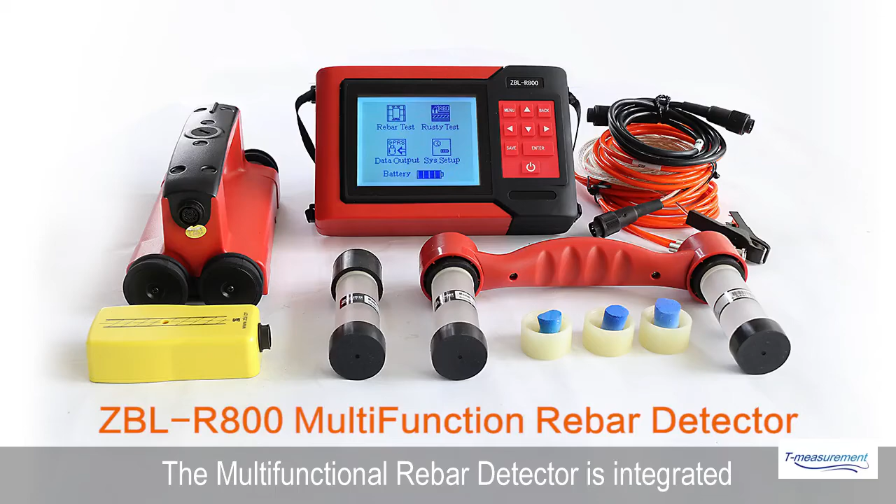This multifunctional rebar detector is integrated and portable, which can estimate rebar diameter, test rebar cover meter, detect rebar location and distribution, and measure rebar's corrosion condition.

Introduction of ZBL R800. R800 consists of a host, rebar sensors, rebar signal wire, copper sulfate electrode, double electrode handle, rust signal wire, U-disc, charger, and so on.

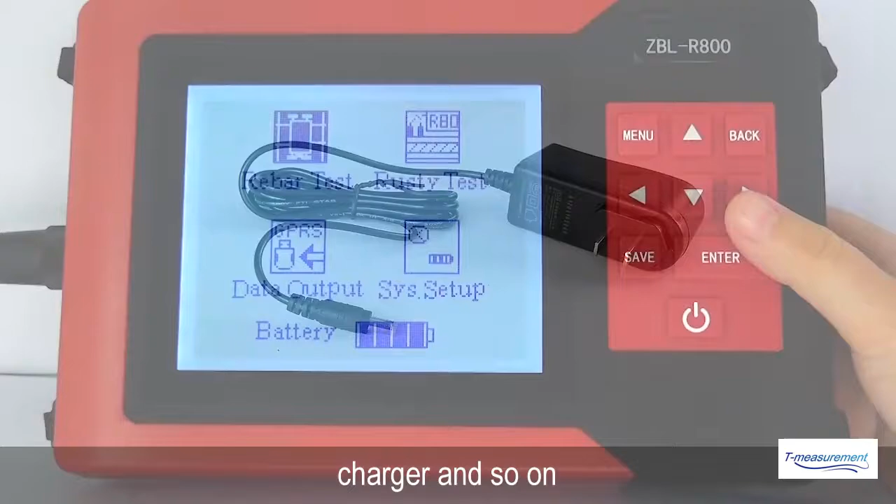All the control operations are done through pressing buttons in the keyboard panel. On the left side of the host are round charging port, USB port, rebar sensor port, and rust electrode port.

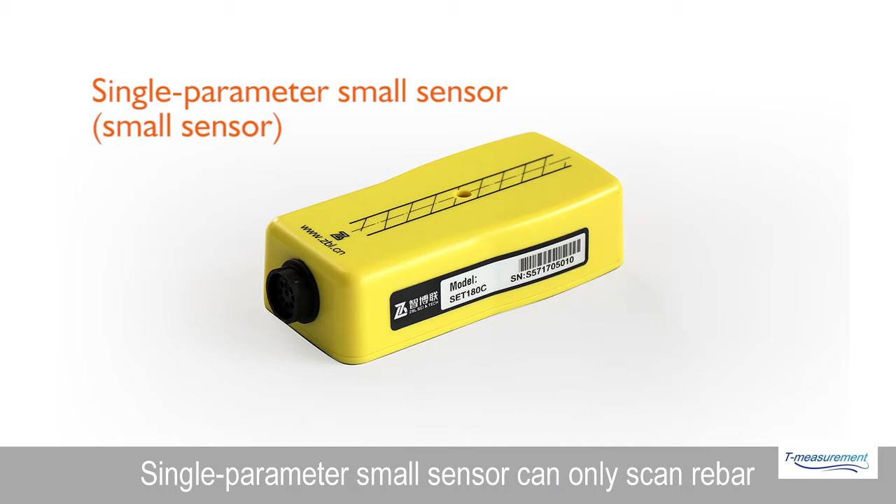R800 detector has two sensors, large sensor and small sensor. Multi-parameter large sensor can scan rebar and record displacement of sensor in real time accurately. Single-parameter small sensor can only scan rebar and it can't record the displacement of sensor.

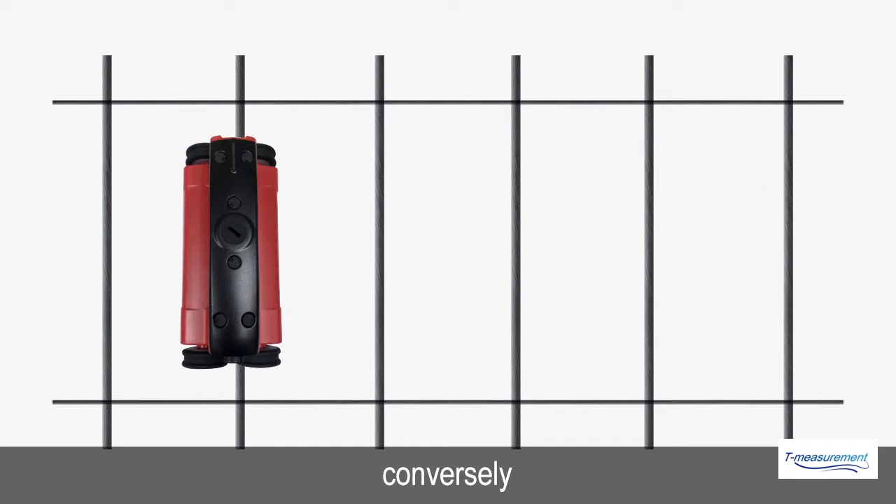When the sensor axis parallels with the direction of a rebar, it is the most sensitive. Conversely, when the sensor axis is perpendicular to the direction of a rebar, the signal is the weakest. Therefore, while measuring, sensor axis should be parallel with the direction of rebar.

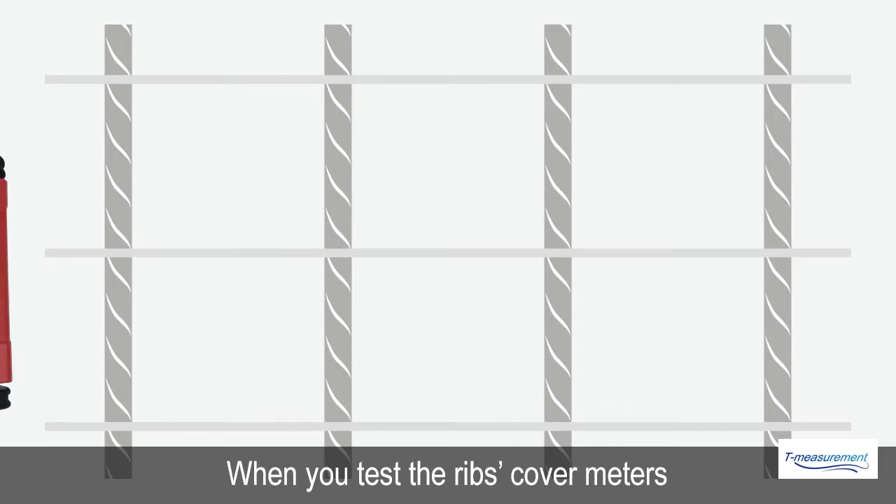Most importantly, when you detect cover meters, you should know clearly what rebar's cover meter you want to test, concrete rebars or concrete stirrups. When you test the rebar's cover meters, you should avoid the influence of stirrups. And likewise, you should avoid the influence of rebars if you need to test the cover meters of stirrups.

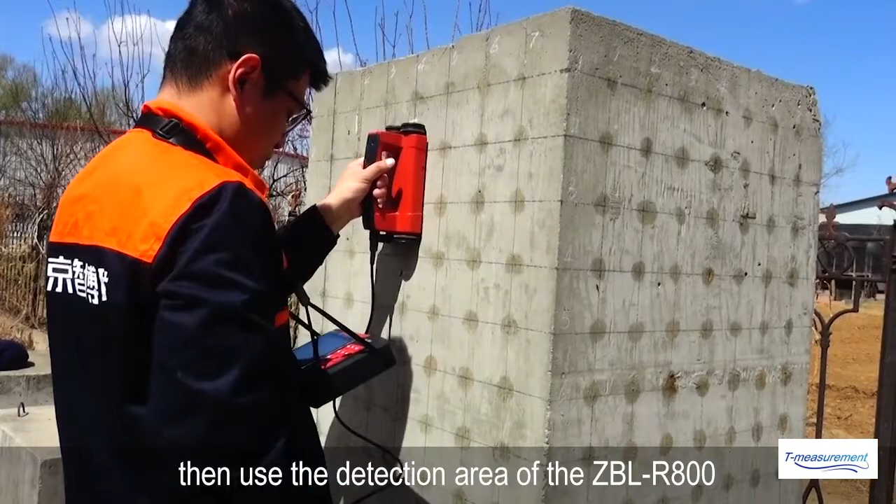For example, if you need to test the cover meter of concrete rebars, you should locate concrete stirrups and mark their position firstly. Then use the detection area of ZBL R800 to scan the space between two stirrups to test the cover meter of concrete rebars.

When you test rebar corrosion on the double pole method, you should install these two copper sulfate electrodes filled with copper sulfate solution on double electrode handle.

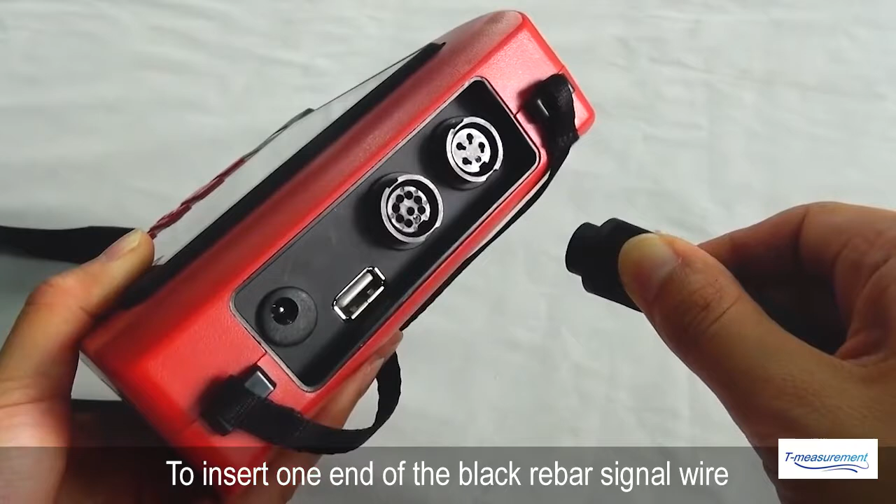Insert one end of the black rebar signal wire to the left side corresponding socket of host, rotating clockwise and locking, and then insert the other end into sensor socket and lock in the same way.

Press right button to turn on screen backlight. Press enter button to enter rebar tester interface.

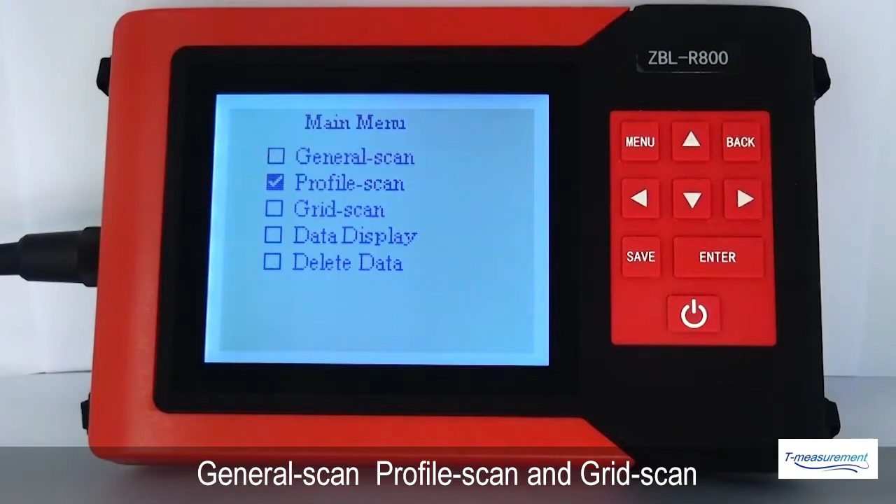Rebar tester has three test modes: general scan, profile scan, and grid scan. Up button and down button can move the option box and select the corresponding option and press the enter button to go to the corresponding sub-menu.

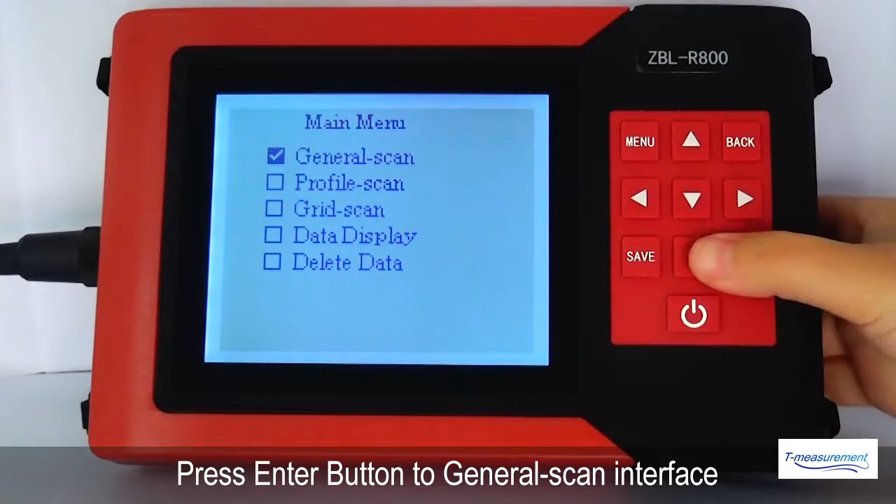General scan is the basic testing function of rebar test. Rebar's distribution, cover meter, and diameter can be measured precisely with this function. Press the enter button to general scan interface.

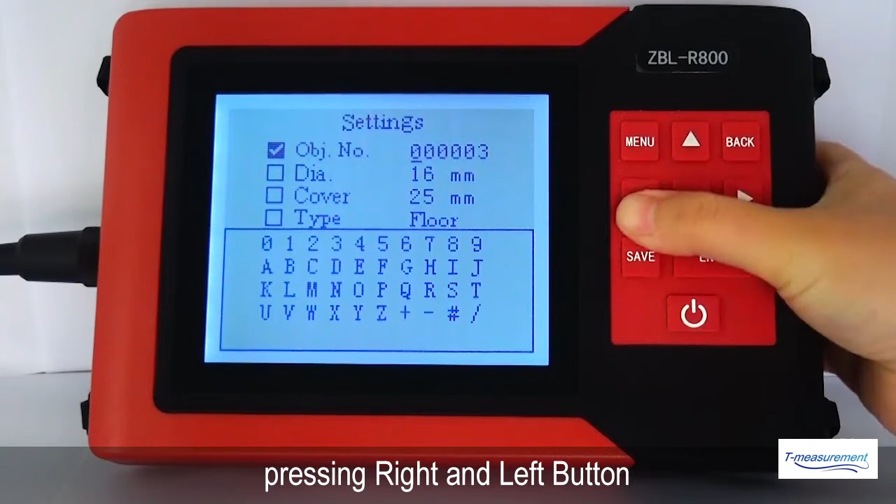Press enter button to set the object number. Move a cursor to the character to be modified through pressing right and left button. Press enter button, the cursor will move to the keyboard. Find the character you want through pressing the direction buttons, and then press enter button. The cursor will go to next character. Press the save button after setting all characters.

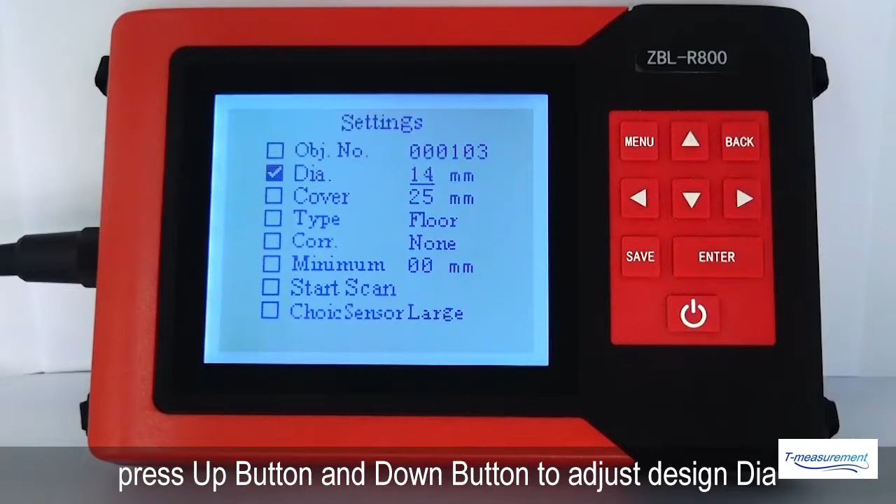Choose diameter through pressing down button, press enter button, press up button and down button to adjust the design diameter, and press enter button after completing adjustment.

Revise design, cover meter, diameter, type, data correction, minimum cover, and choose sensor based on real project information.

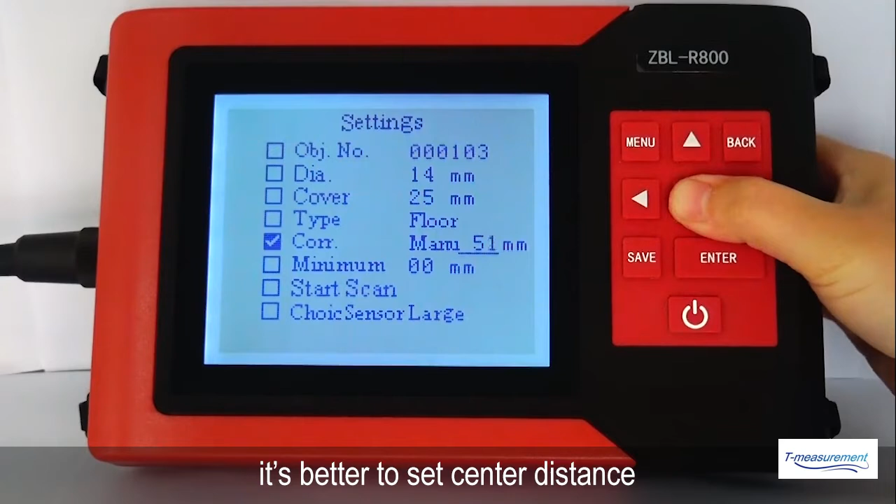Data correction. In order to lower the effects for the measurement of cover meter of tested rebar by adjacent abreast ones, it's better to set center distance from adjacent rebar to tested rebar, and then the detector can modify test result automatically and improve test accuracy.

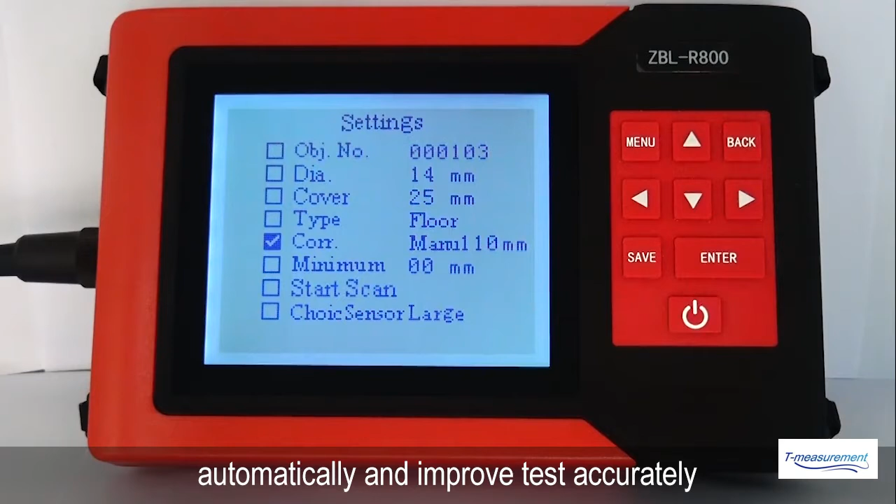After setting all parameters, choose the Start Scan, press Enter button to go to Test Interface. Please hold the sensor in the air away from ferromagnets.

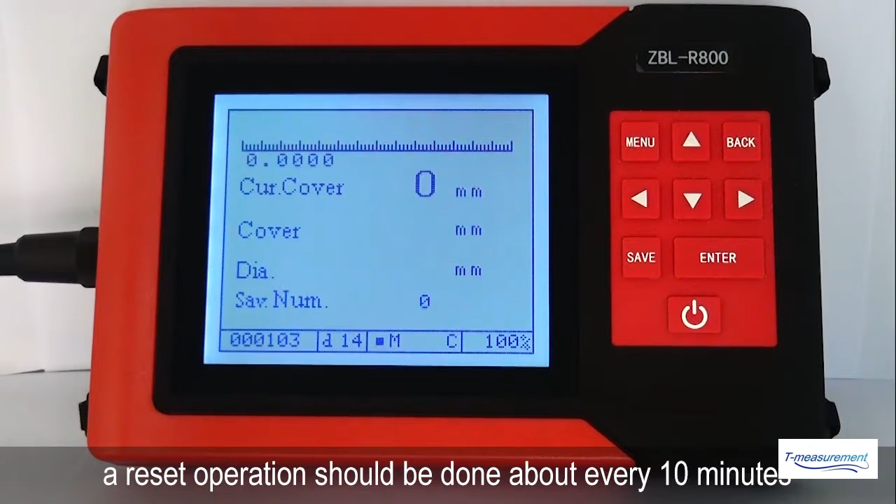After pressing Enter button, the instrument will reset automatically and the present thickness will show in blank. During detection process, a reset operation should be done about every 10 minutes. While doubt on the measurement data, measure again after resetting.

Current cover. The current cover meter is the equivalent distance between sensor and rebar. The larger the equivalent value is, the further it is. When equivalent value exceeds the measurement range of sensor, it is 0.

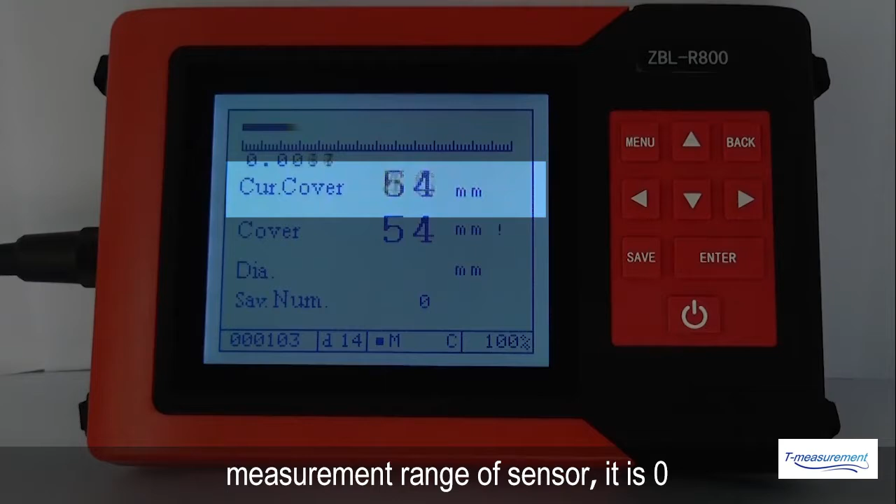Cover. Display of measurement value of thickness of concrete cover automatically. If users use the data correction, it shows the corrected value.

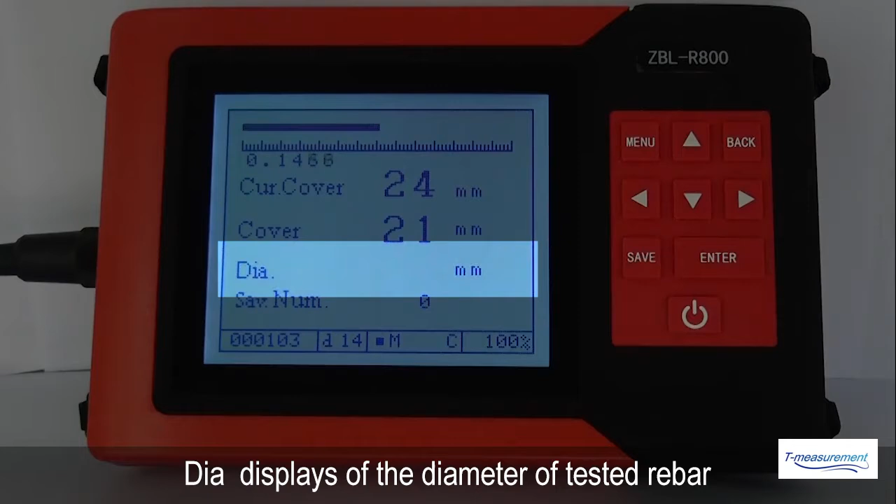Diameter. Display the diameter of tested rebar. Pressing up button for the measurement of diameter when the sensor is just above the rebar, and the rebar diameter value will appear a moment later.

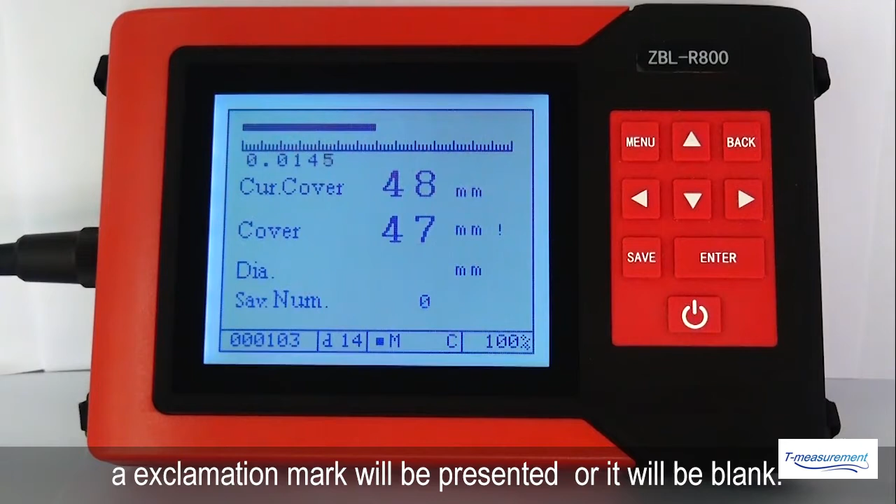Save number. It is the stored amount of cover meter for present object. When the tested cover meter exceeds the range of specification, an exclamation mark will be presented, or it will be blank. The bottom line shows the object number, design diameter, status information, and qualification rate.

A solid square in the information status bar represents small range, and an open square represents large range. Large range is suitable for large cover meter situations. The default range is small range, and you can change the range by pressing the right button.

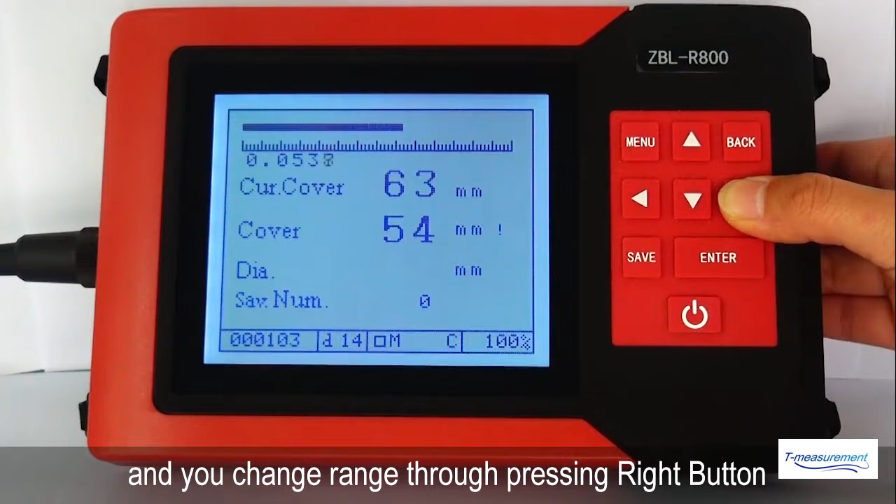M represents manual storage, while A represents automatic storage. You can adjust this by pressing the left button.

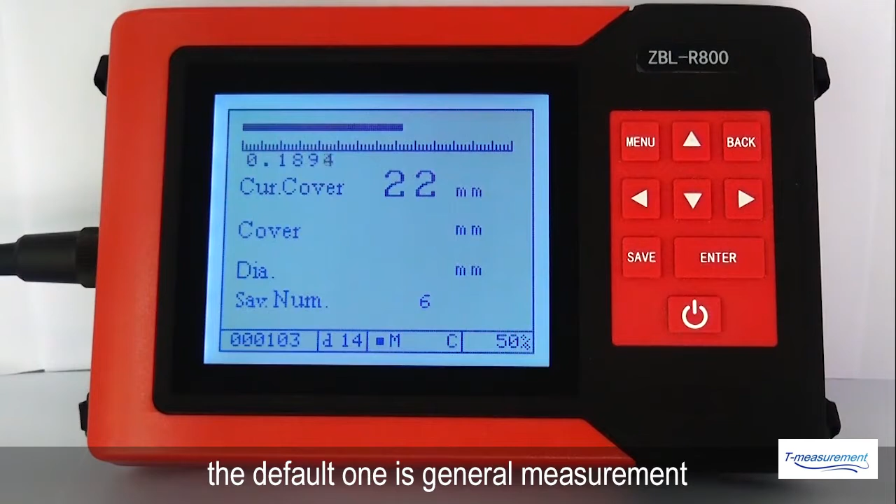This icon represents denser rebar measurement, while blank represents general measurement. The default is general measurement, and you can switch by pressing the down button. C represents correction, while blank means no correction.

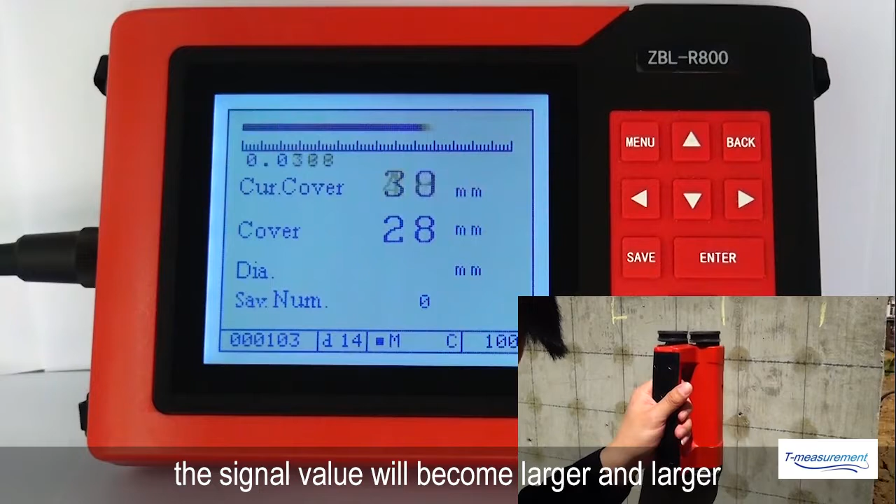Place the sensor on the surface of the tested concrete, parallel with the tested rebar, then move the sensor along a direction at a constant speed. As the sensor approaches the rebar, the signal value will become larger and larger, and the biggest signal value identifies the location of the rebar.

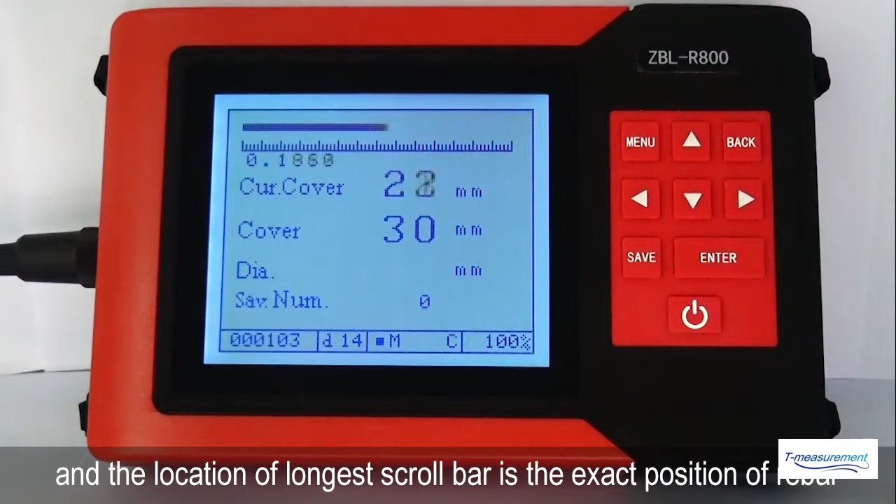When the sensor approaches the rebar, the scroll bar will lengthen gradually, and the location of the longest scroll bar is the exact position of the rebar. When the sensor goes over the rebar, the buzzer will alarm.

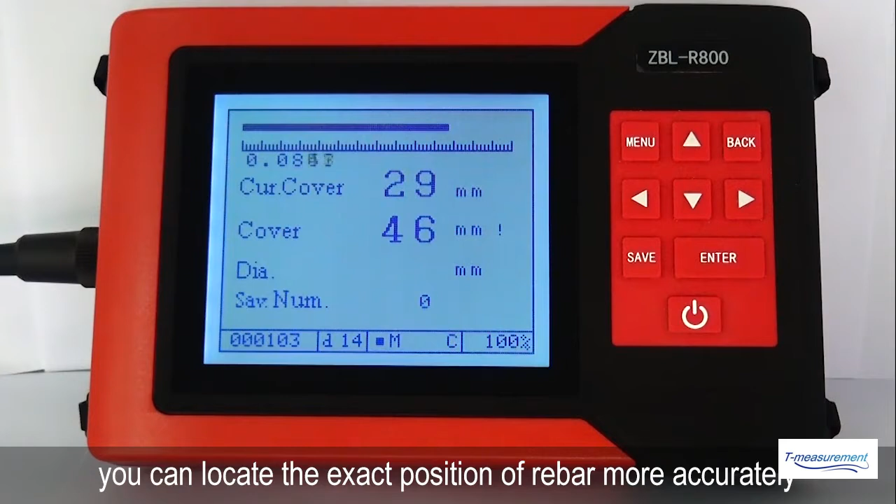Signal value is the fundamental basis for measuring the thickness of cover. When the change of cover meter is within 1 mm, the current cover value will not change, but the signal value can reflect the minimal change. Therefore, according to it, you can locate the exact position of the rebar more accurately.

When the sensor approaches the rebar, the current cover value will gradually change smaller, or the current cover value becomes larger. The location of minimum cover is the exact location of the rebar.

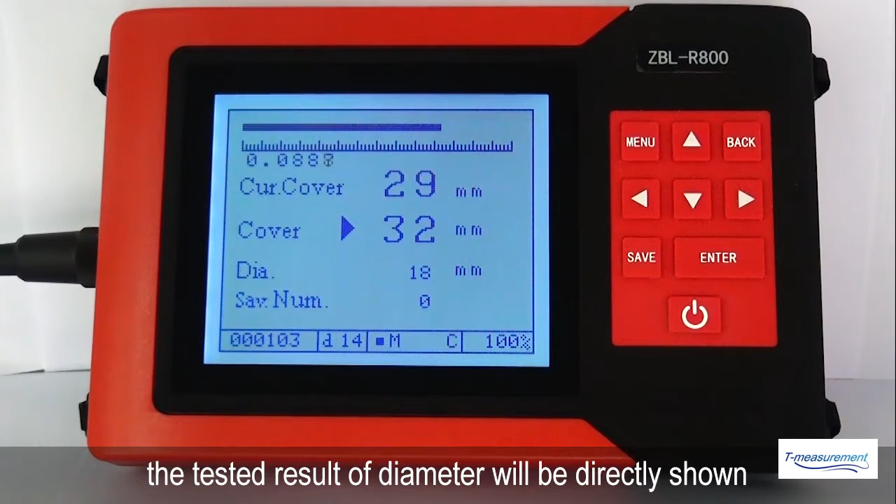Place the sensor above the tested rebar and parallel with it, then press the up button. After about 2 seconds, the tested result of diameter will be directly shown in the position of diameter.

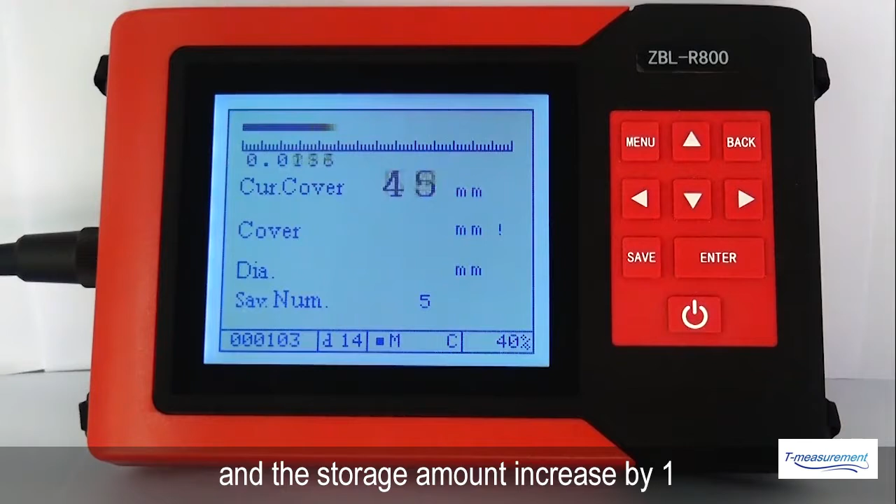Under manual storage mode, pressing the Save button will store the diameter and thickness of cover, and the storage amount increases by 1. Under automatic storage mode, the diameter value and thickness of cover will be stored automatically.

After the test is completed, press the Back button to return to the parameter setting interface, or press the Menu button to go back to the main menu. Profile scan.

Profile scan is a test displaying the location of the tested rebar and thickness of cover with a sectional distribution map. Choose Profile Scan and enter the parameter setting interface. Under this test mode, it is necessary to choose the large sensor to scan.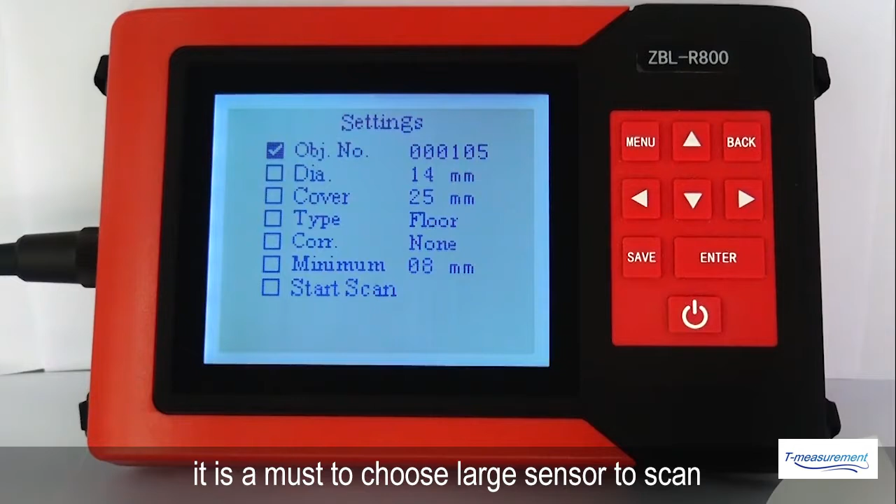After parameter setting, select Start Scan and press Enter to store the parameters and enter the test interface. Reset first, and after resetting, press the Save button to enter the test interface. A square cursor will appear in the top left corner, indicating the location of the sensor.

While testing, move the sensor at a constant speed. When the sensor goes over a bar, the buzzer will alarm. The tested rebar will be displayed in a corresponding coordinate, indicated by a black cross.

The thickness value of cover and the coordinates of the tested rebar will be displayed above the rebar, and the tested result will be stored simultaneously.

The horizontal solid line in the central position is the design thickness value. The upper and lower dotted lines are the maximum and minimum thickness of cover.

If the black cross appears under the lower dotted line, it means the rebar's cover is rather thick, and if the black cross appears above the upper dotted line, it means the rebar's cover is pretty thin.

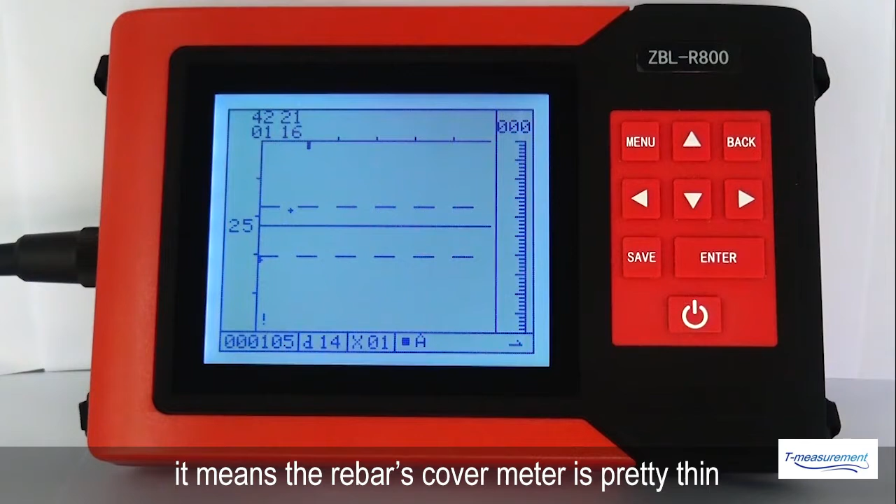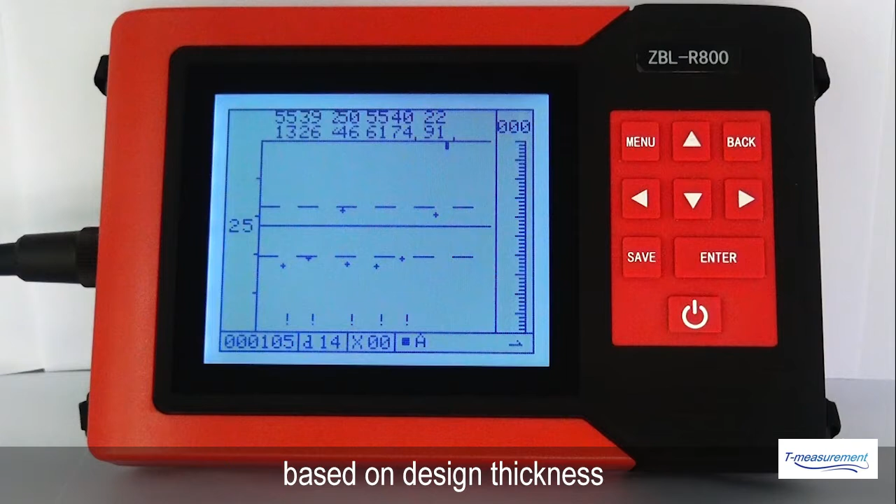During the test process, when the tested thickness of cover exceeds the range of standard requirements based on the design thickness, an exclamation mark symbol will appear, or it will be blank.

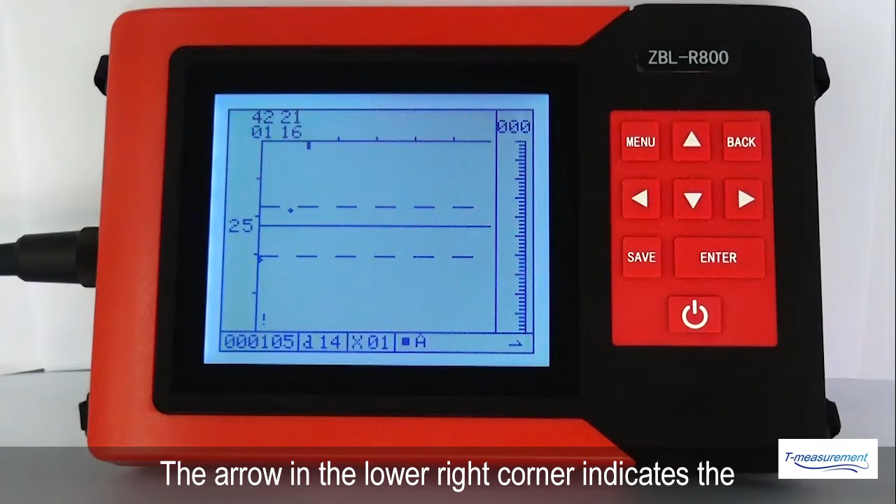When the moving distance is more than 1.2 meters and goes over the range of each screen, it will turn pages automatically. The X in the status bar displaying the total amount of pages will increase by 1. The arrow in the lower right corner indicates the direction the sensor is moving.

After the test is completed, press the Save button, then press Back to store the testing data and return to the Parameter Setting interface, or press the Menu button to return to the Main menu.

Grid Scan. Grid Scan mainly displays the distribution of grid-distributed rebar through a grid diagram, showing the location of rebar and the thickness of cover at the same time.

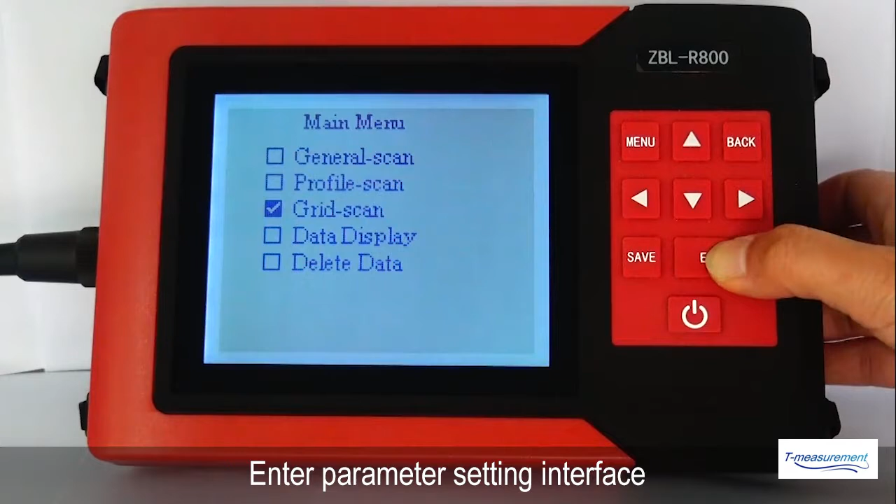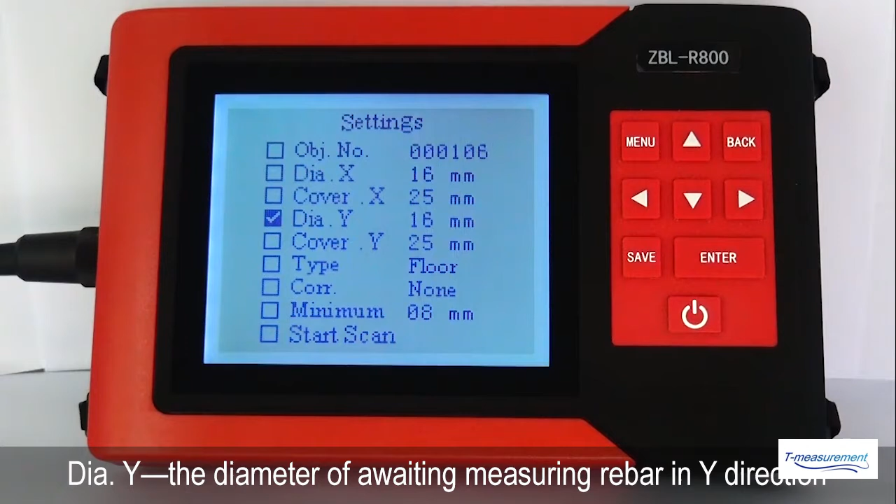Enter the Parameter Settings interface. Diameter X is the diameter of awaiting measuring rebar in the X direction. Cover X is the thickness of cover of awaiting measuring rebar in the X direction. Diameter Y is the diameter of awaiting measuring rebar in the Y direction. Cover Y is the thickness of cover of awaiting measuring rebar in the Y direction.

After parameter setting, choose Start Scan and press Enter to go to the Test interface. Reset first, and after resetting, press the Save button.

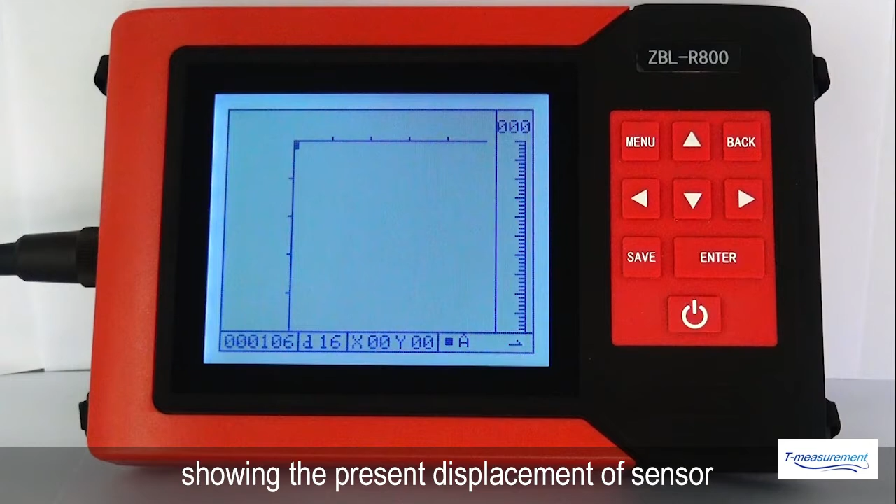A square cursor appears in the upper left corner, showing the present displacement of a sensor. Scanning can be started in X direction as default, moving the sensor at a constant speed.

When the sensor goes over rebar, the buzzer will alarm and the tested rebar will be displayed in coordinate. The thickness value of cover and X-axis coordinates of the tested rebar will be displayed on the upper side of the rebar, and the tested result will be stored simultaneously.

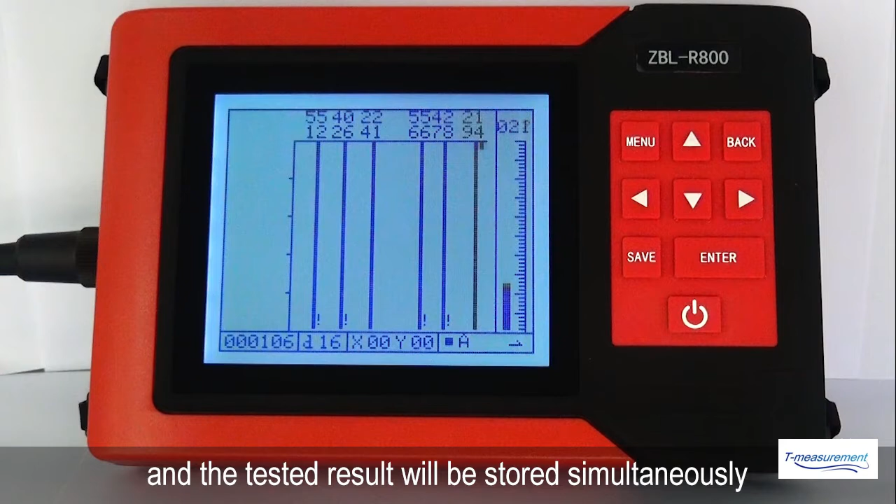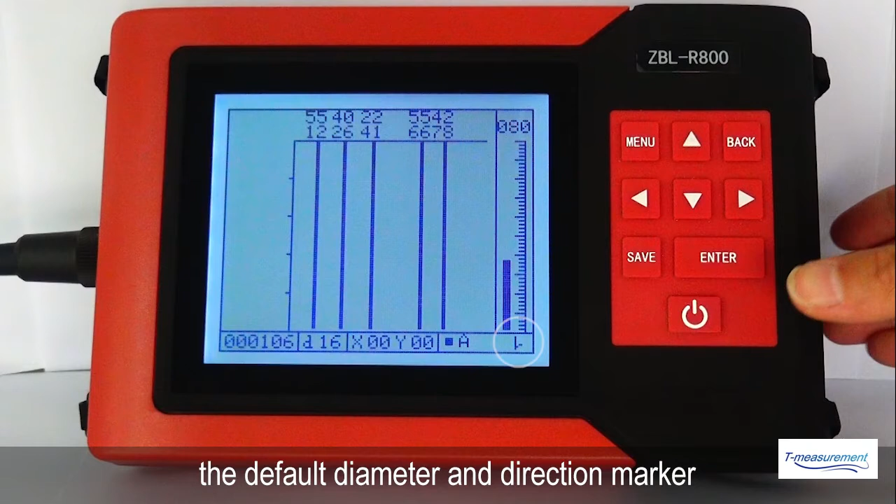When X direction test is completed, press the Save button to end the storage state. Press the Up button to shift to another direction. The default diameter and direction marker in Y direction will be shown in the status bar.

Press the Save button for scanning, moving the sensor constantly. When the sensor goes over rebar, the buzzer will alarm. The tested rebar will be displayed in coordinate, with thickness value of cover and Y-axis coordinates of the tested rebar displayed on the left side of the rebar.

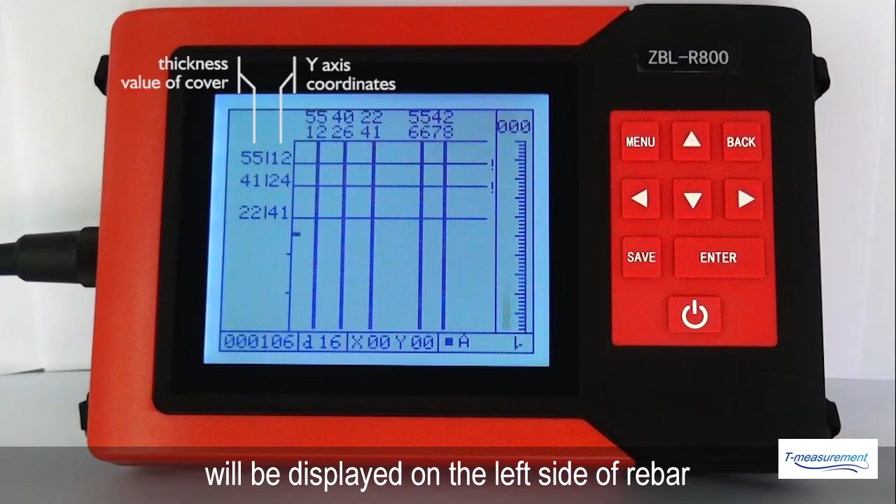In grid scan, the screw bar can indicate the relative distance between the sensor and the tested rebar. When the sensor is closer to the rebar, the screw bar will lengthen gradually, and the current thickness value in the upper right will decrease accordingly, which is different from the meaning under general scan.

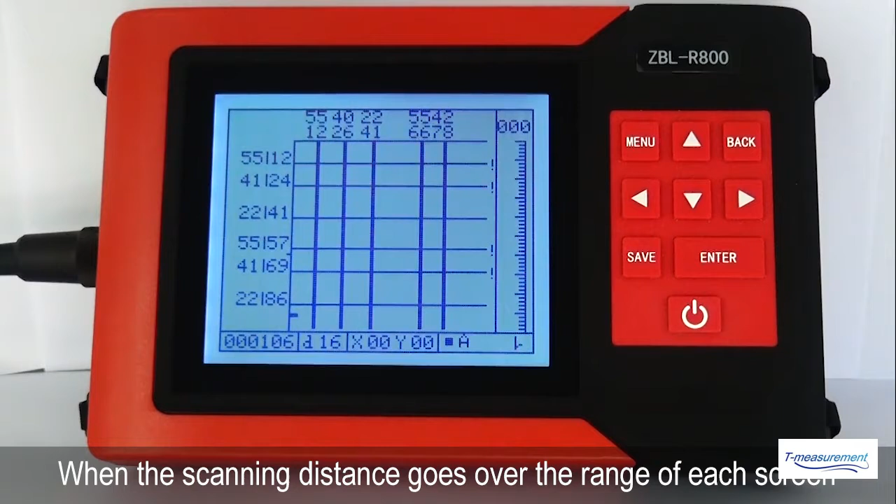When the scanning distance goes over the range of each screen, it will turn pages automatically. The increase by 1 in X and Y direction shows a page turned. After completing the test, press the Save button and exit the test interface.

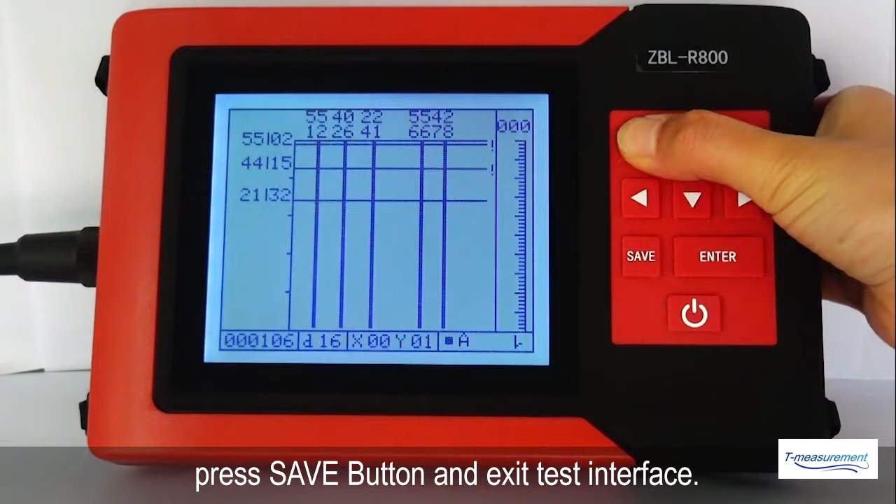After testing, you can check the data or image by entering Data Display. You can delete data by choosing Delete Data, but make sure the data to be deleted has been transferred to your computer, as this operation is irreversible.

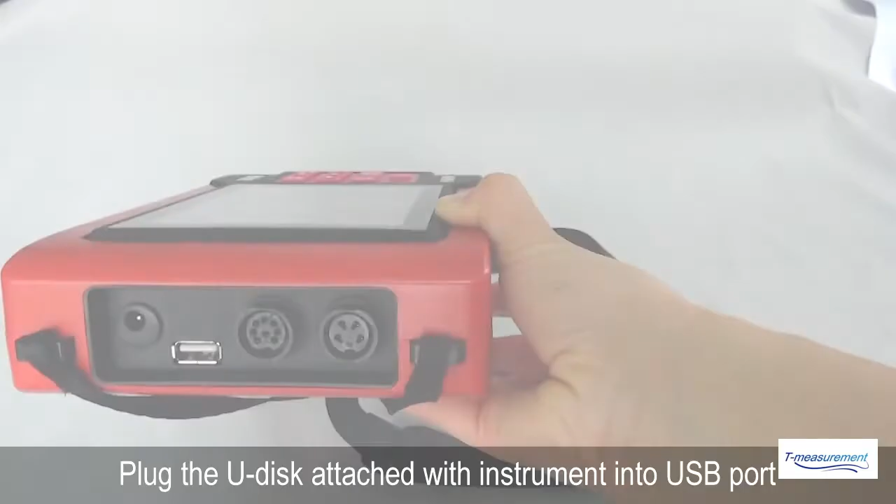Data analysis: data transmission. Plug the U-disk attached with the instrument into the USB port and then select Data Output, then press the Enter button to enter the USB options interface.

Select Transfer Rebar Data and then press the Enter button. The instrument will start up the U-disk power supply automatically. Then, running OK indicates a successful transmission.

Data Analysis. Copy the testing data to the computer and double-click the Rebar Measurement Data Processing software on the desktop of the computer. Click the File button on the menu bar and open the data file you want to analyze.

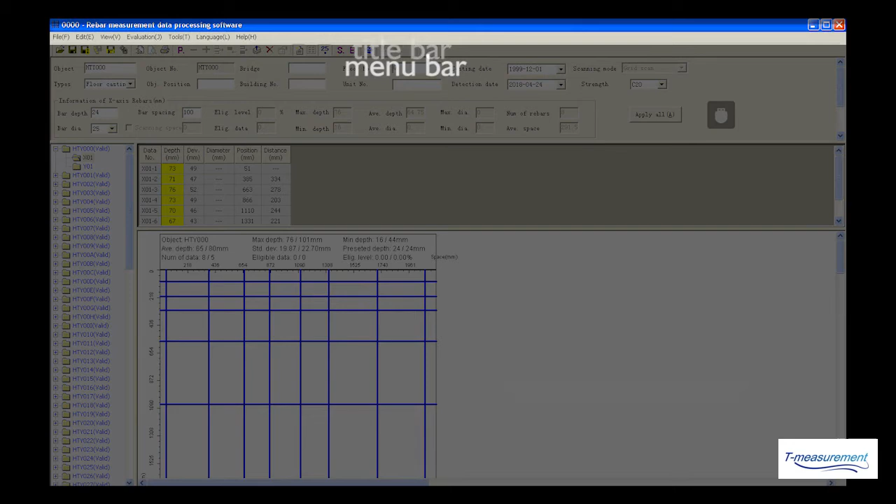On the top of the software interface is the title bar, followed by the menu bar, toolbar, and object information area. The object list is on the left side of the software interface, showing all objects in the project, while on the right side are the data table area and data diagram area.

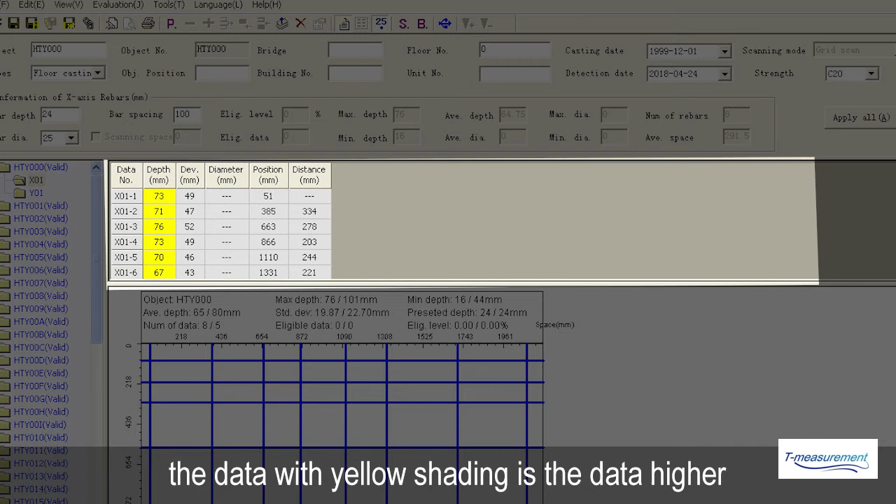The data table area is used to display the original testing data of each measurement point of the current object, and this icon indicates no data. The data with yellow shading is higher than the allowed deviation range, and the data with red shading is lower than the allowed deviation range.

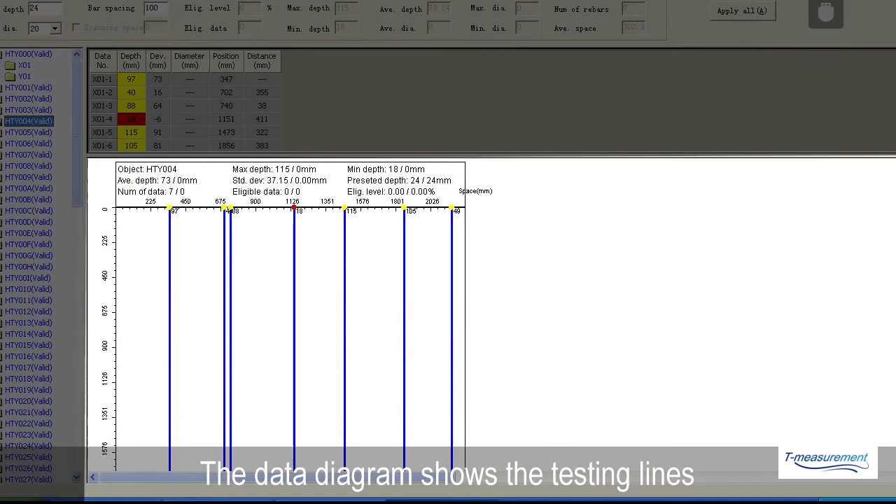The data diagram shows the testing lines or profile diagram of the current tested object. Take this object as an example, whose scanning mode is general scan. You can input object information in the object information area. You can find this object's name is 000001, with design cover meter and design diameter of 75 mm and 10 mm separately.

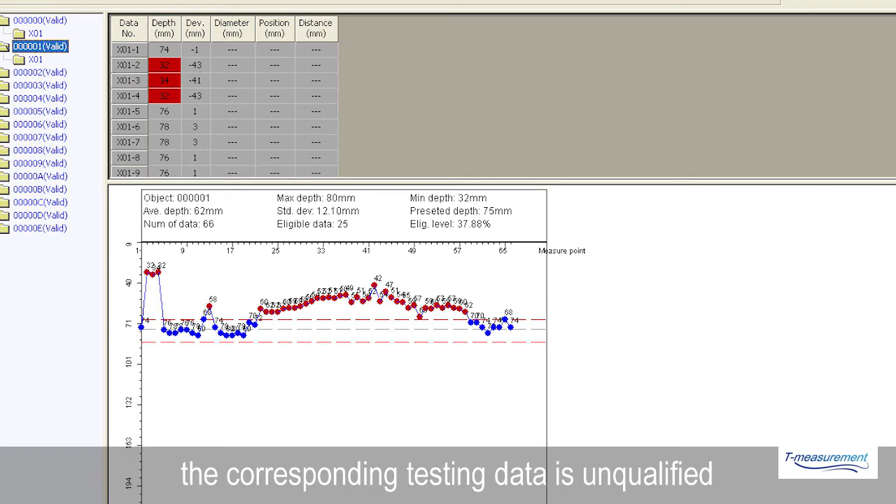Look at this data diagram area. A blue measurement point means the corresponding testing data is qualified, while a red measurement point means the corresponding testing data is unqualified.

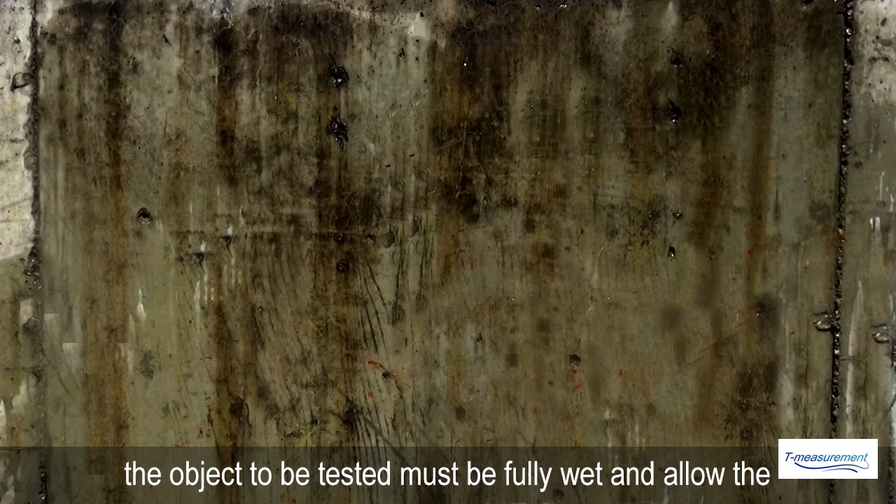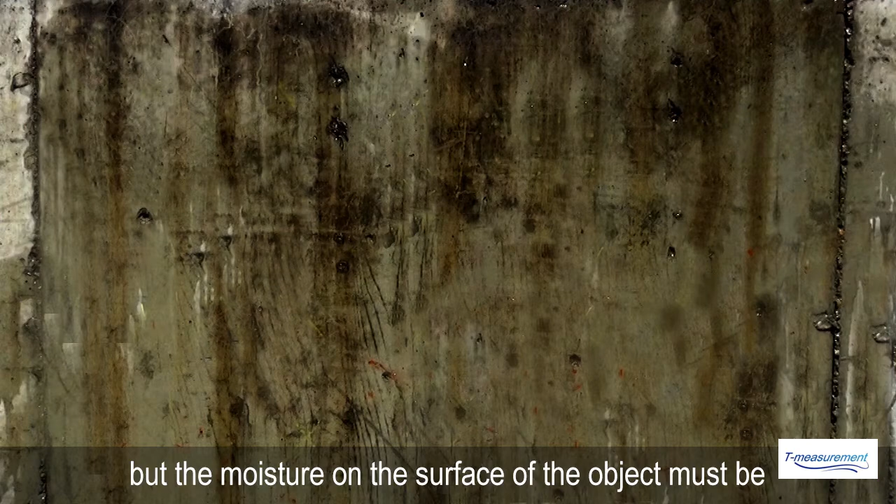Preparation before test: before the test, the object to be tested must be fully wet, allowing the water to completely penetrate into the interior to reduce the electrical resistance. But the moisture on the surface of the object must be wiped dry during the test.

It's better to select an area with rebar corrosion signs or possibility of corrosion. The area should be less than 5 meters by 5 meters.

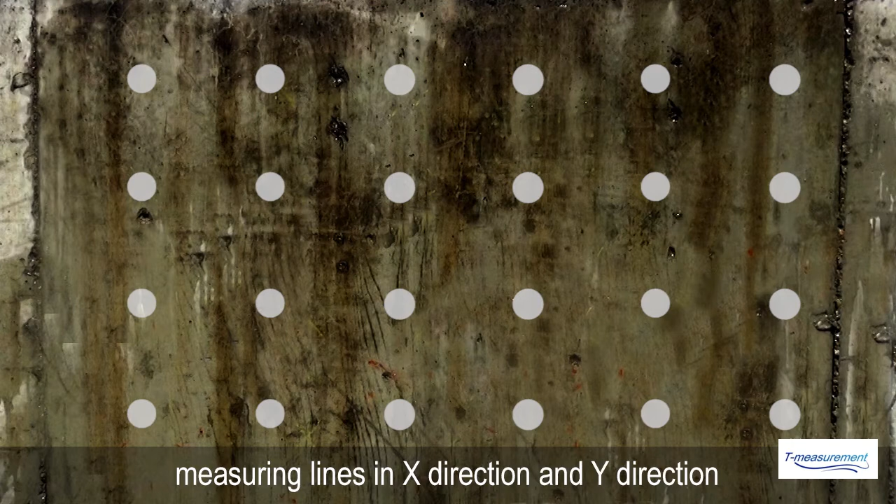Distribute measuring lines on the surface of the object to be tested. Measuring lines in the x direction and y direction constitute a square grid. The crossing point of the measuring lines is the measuring point.

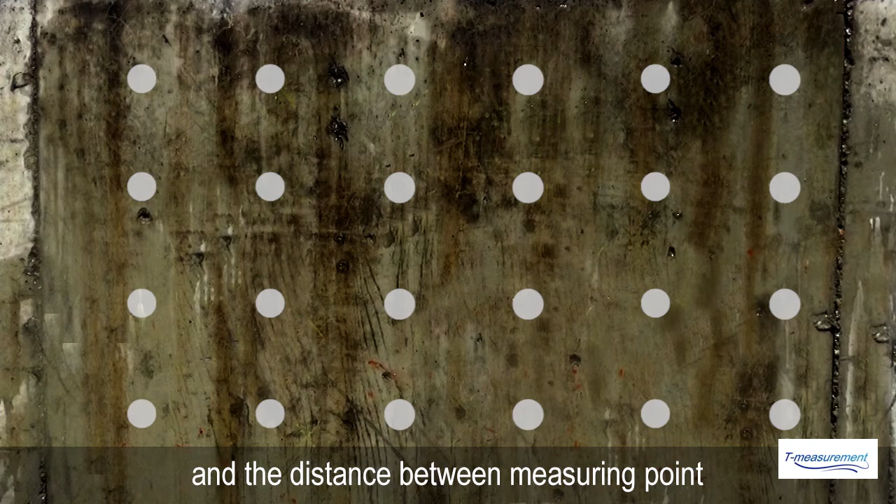Generally, the space of single electrode measuring points is set to 10 cm to 50 cm, and the space of double electrode measuring points is fixed at 20 cm. Every survey area should distribute 30 to 50 measuring points, and the distance between measuring points and the edge of an object should be greater than 4 cm.

Configure copper sulfate solution. Configure saturated copper sulfate solution with distilled water and standard solid copper sulfate, and shake the electrode appropriately, making the copper sulfate solution reach saturation, with a small amount of copper sulfate particles existing.

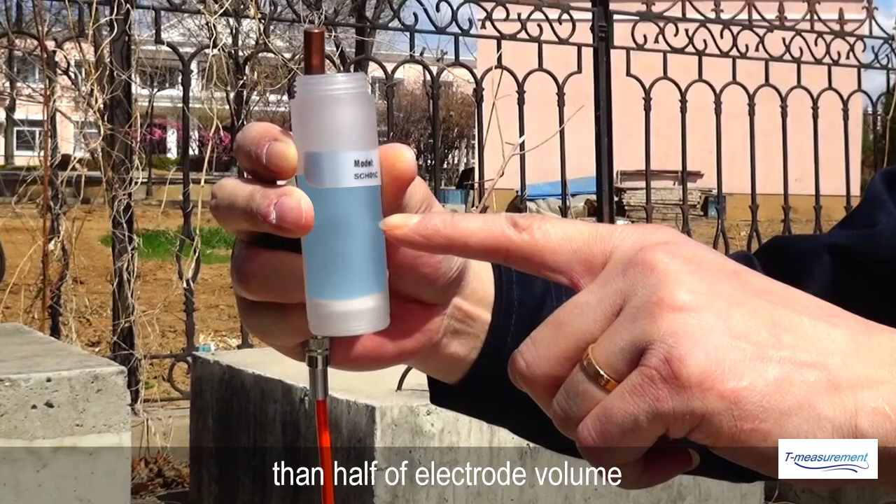Unscrew the upper rubber sleeve and socket, inject copper sulfate solution into the electrode, and the copper sulfate volume should be more than half of electrode volume. Firstly, soak a sponge with distilled water. When softened completely, screw it to the electrode bottom. At the same time, keep a good contact between sponge and the bottom white ceramic chip.

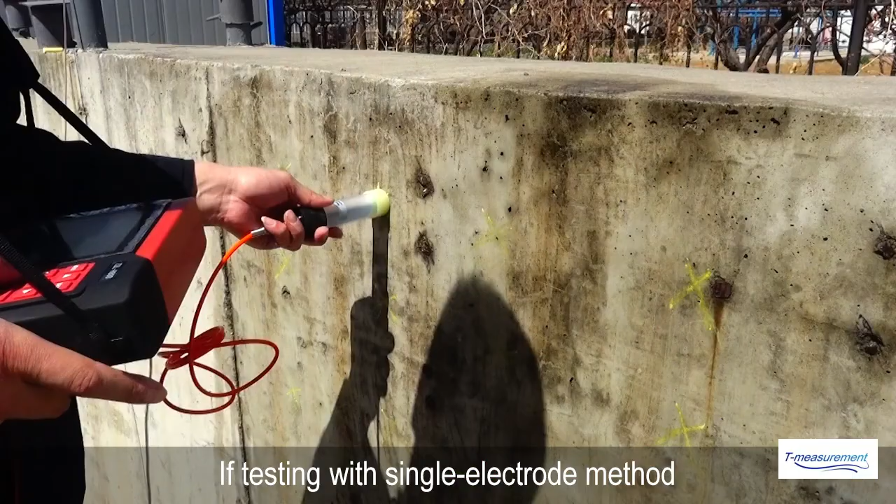Connect instrument. If testing with double electrode method, it is necessary to install the two copper sulfate electrodes on the double electrode handle, and connect the two electrodes to current sensor port of instrument with double electrode signal wire. If testing with the single electrode method, it is necessary to connect a copper sulfate electrode to current sensor port of instrument with signal wire.

Then chisel concrete in an appropriate position to expose rebar. The surface of rebar should remove rust and dirt to guarantee effective connection between rebar and the wire. Then clip rebar with the clamp of earth wire.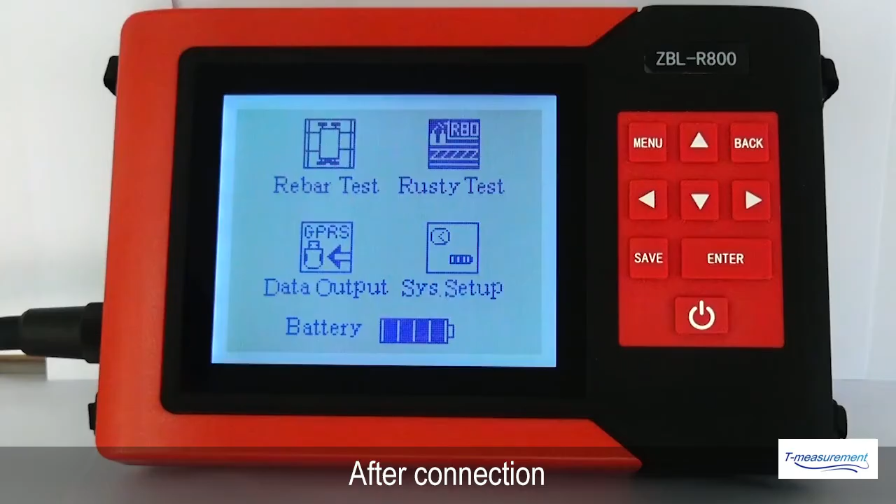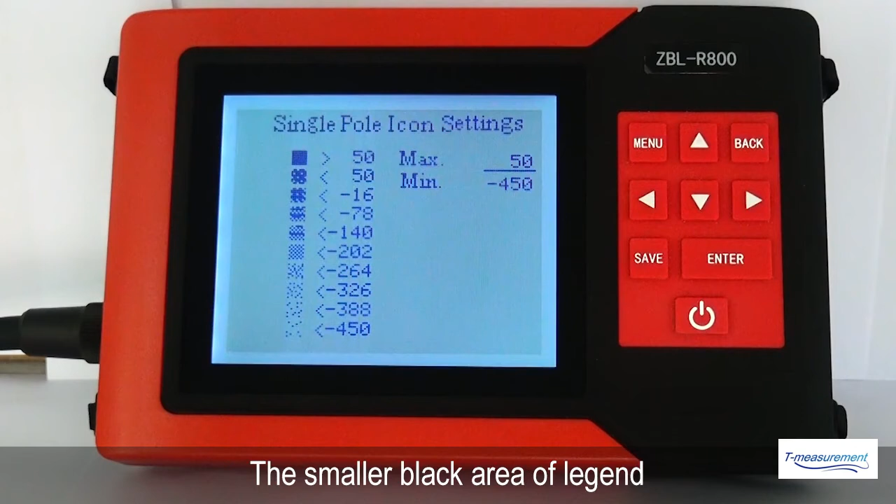Parameter setting. After connection, choose Rusty test to go to parameter settings interface. Choose a single pole or double pole according to your requirement. In icon setting, different legend represents different potential value. The smaller black area of the legend, the smaller potential value is, or the larger potential value is. User can easily determine possibility of rebar corrosion based on legend distribution in survey area.

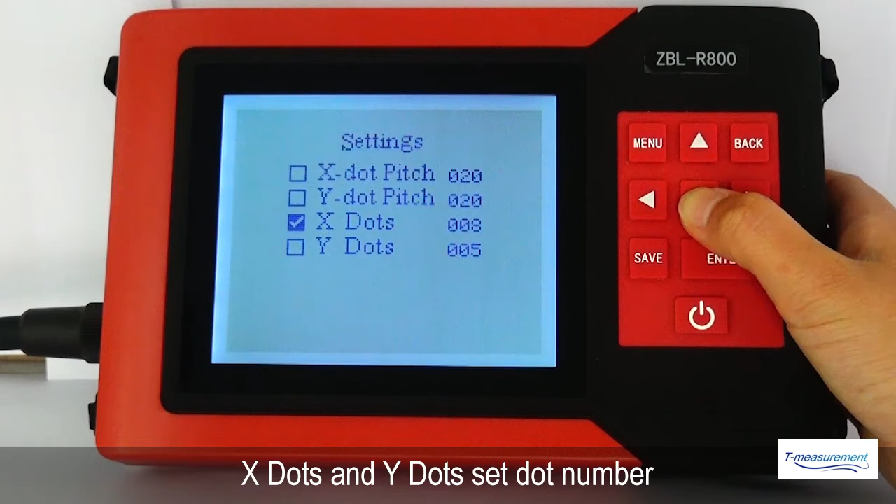X dot pitch and Y dot pitch set dot pitch in X direction and Y direction, and generally the two values should be consistent. X dots and Y dots set dot number in X direction and Y direction. Range of single electrode and double electrode measuring points is 1 to 18 in X-axis and 1 to 13 in Y direction.

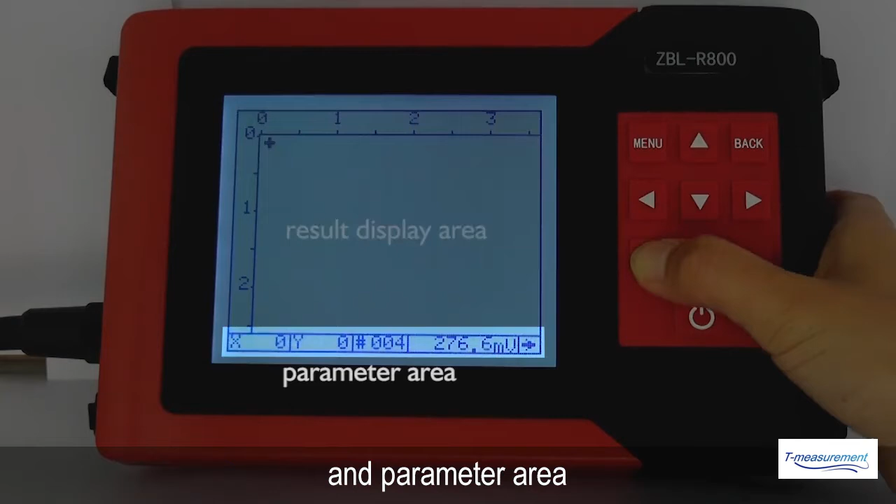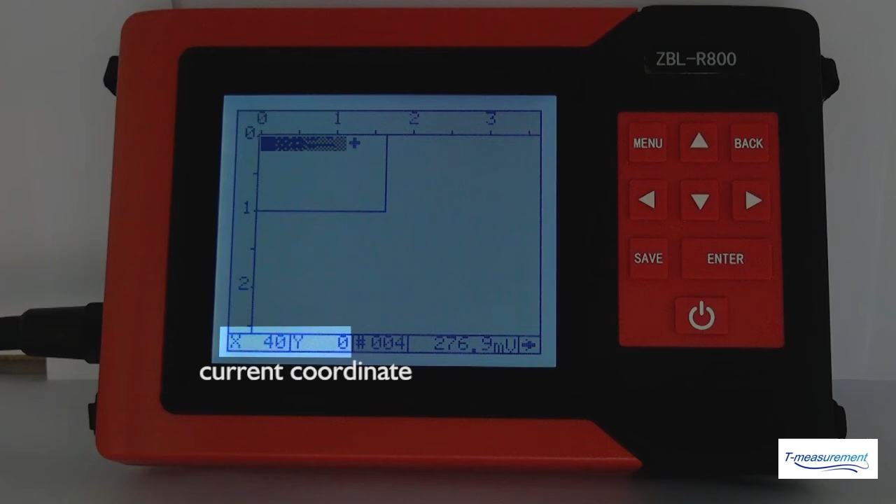On-site test. Measuring interface is composed of result display area and parameter area. The top of the screen is the result display area with legend to show measuring result of every measuring point, and different legends represent different potentials. The lower part is parameter area displaying current coordinate, object number, current tested potential, and test direction. The cross at the upper left of the screen indicates the position of the electrode.

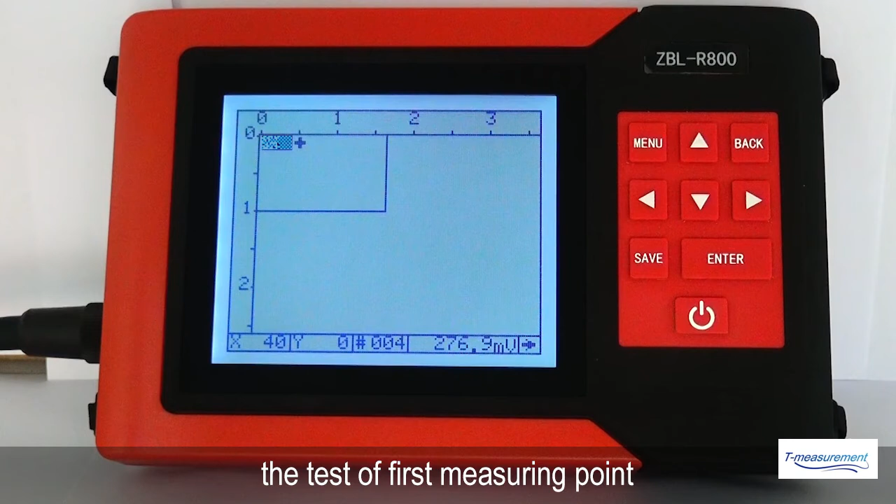If it is a single electrode test, place the electrode on the first measuring point from the left end, and make sure sponge fully contacts the measuring point. At the same time, the corresponding icon to the conductivity of the measuring point will be displayed on the screen. After the icon is stable, press the Save button, and then we finish the test of first measuring point. After testing the first row of measuring points one by one, the cross will automatically jump to the starting position of next row, and start the test of next row of measuring points.

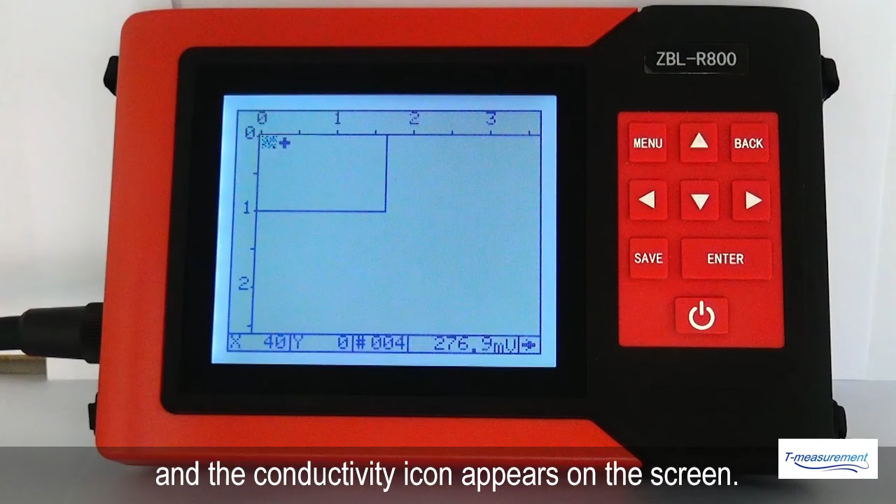If it is a double electrode test, place the double electrode on the first and second measuring points from the left end, and make sure sponges are in full contact with the measuring points, and the conductivity icon appears on the screen. Press the Save button after the icon is stable, then move the double electrode to the second and third measuring points for testing, followed by the third and fourth measuring points. Test all the measuring points in the same manner.

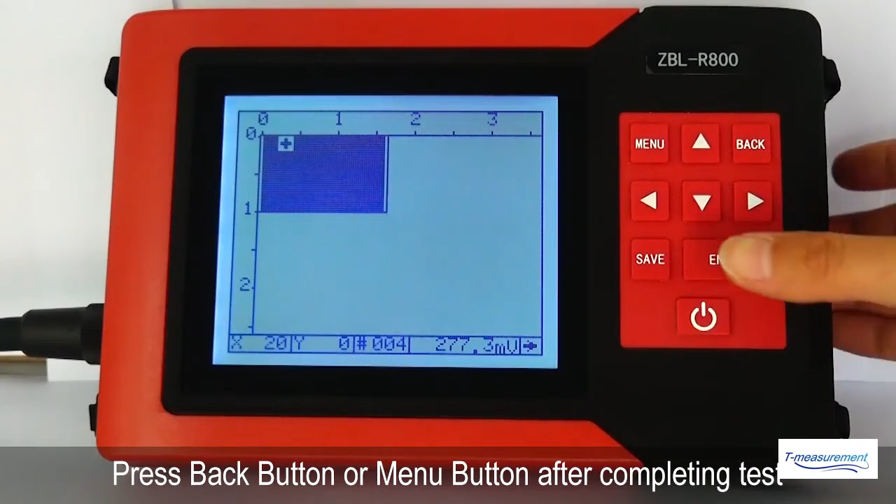Press Back button or Menu button after completing test, and you can press Data Display to check test data. You can delete all test data through pressing Delete Data, but before deleting, make sure all data have been transferred to a computer, as the deleting operation is irreversible.

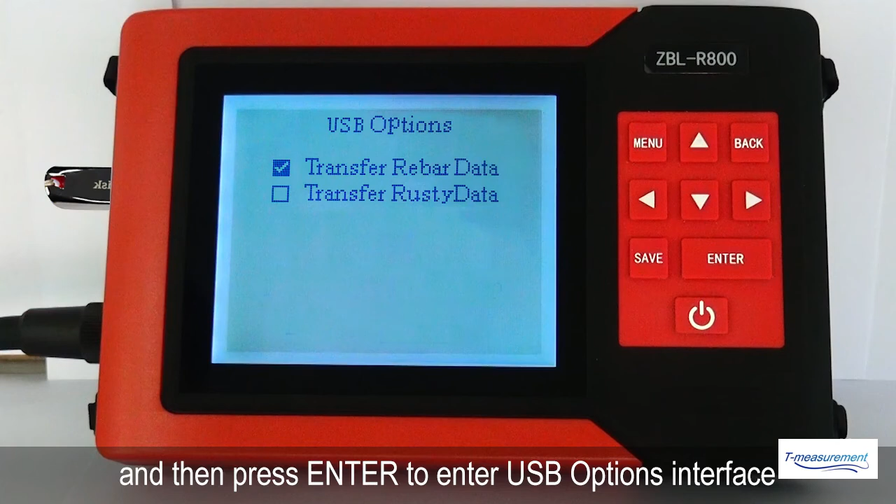Corrosion data analysis. Data transmission. Plug the U-disc attached with the instrument into USB port, then select Data Output, and press Enter button to enter USB Options interface. Select Transfer Rusty Data, and then press Enter button. Instrument will start up U-disc power supply automatically. Then Running OK indicates a successful transmission.

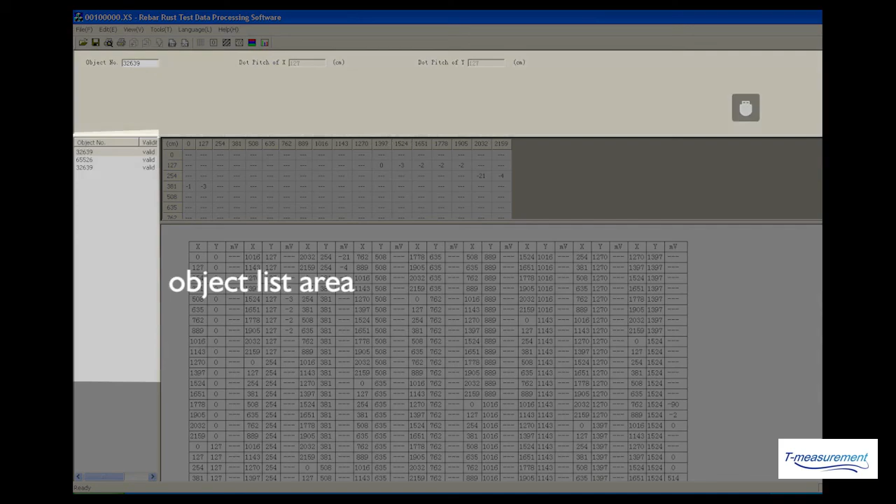Data analysis. Copy the testing data to computer, and then double-click Rebar Rust Test Data Processing Software. Click File. Choose the data file you need to analyze. The software interface consists of a title bar, menu bar, toolbar, object information area, object list area, data area, and object view area.

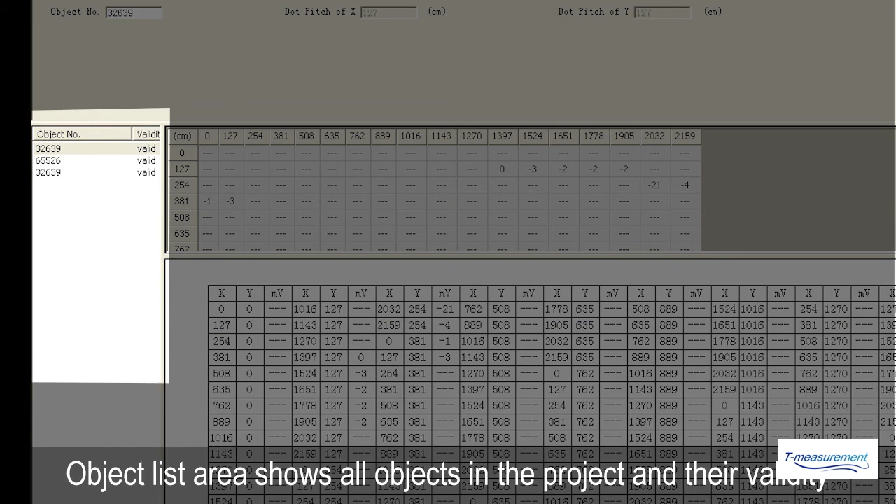Object information area shows the object number, dot pitch of X and dot pitch of Y of the tested object. Object list area shows all objects in the project and their validity. Data area displays the original testing data of measuring points of the object. This icon means there is no testing data in this measuring point.

Object view area displays the testing data in 6 different ways: data table, grid image, detection data, contour graph, frequency map, and statistical result. Through Tools, Export to Excel, you can generate an Excel file.